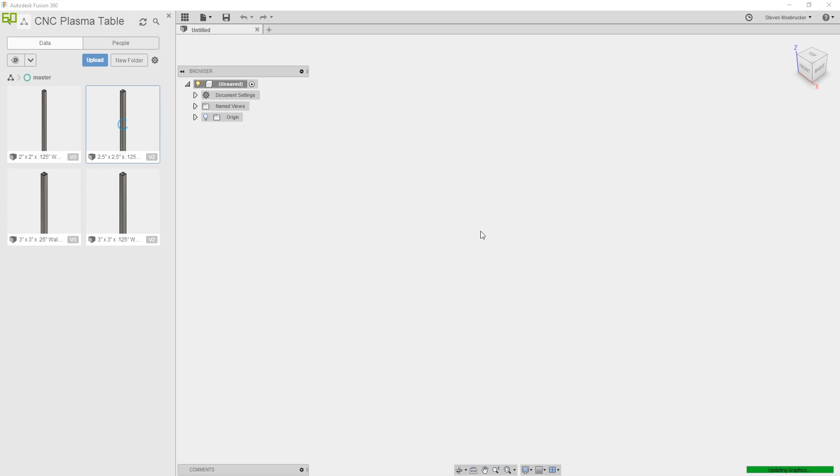So we are back working on the CNC plasma table. This is video number 3. Last video we decided on the 2.5 by 2.5 size beam for the arms and legs, about 2.5 by 2.5 by 1/8 inch wall.

Unfortunately, I forgot to call Sims earlier to ask if they had that. They closed at 12 and now it's 12:13, so no longer open. So I'm thinking somewhere around 2.5 by 2.5 for a decent size plate.

Why is it doing this? Oops.

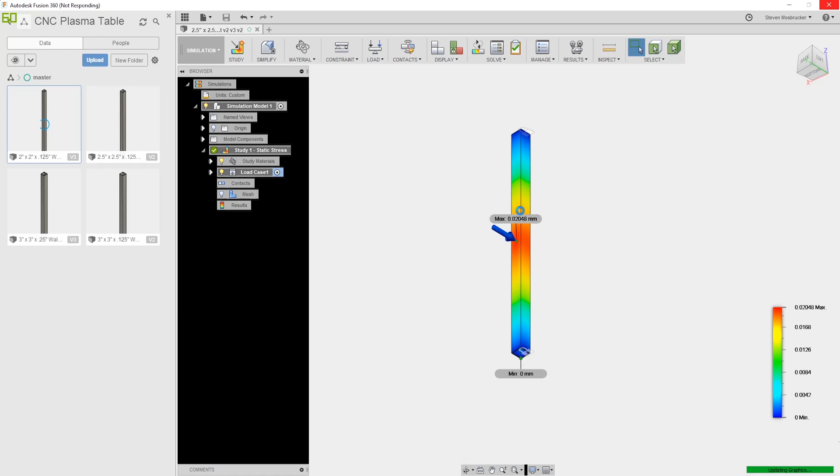Easier to install. So maybe 2 inches. 2 inches is pretty small, about like this. Apparently it says that it's okay.

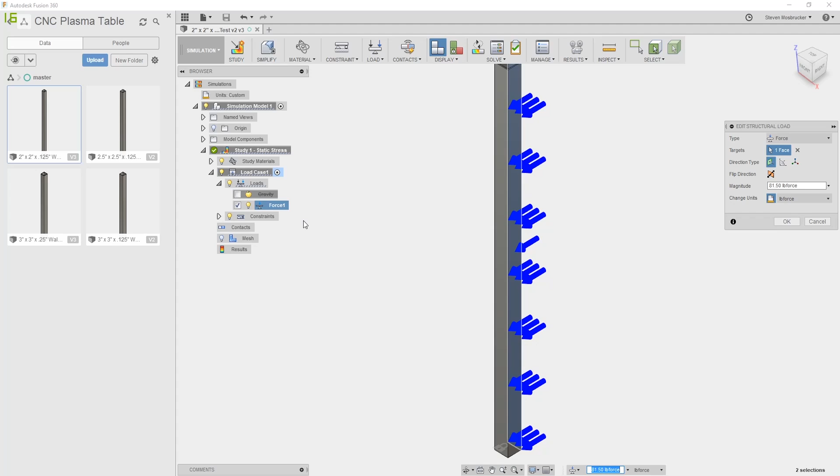Let's try this again, I wonder if it doesn't like me recording it. Yeah, this is 1.5 thou. I think this will be okay. For how much load is this? This is 81 pounds, so this is a normal load, I believe.

This is a 1/4 inch for this section, and obviously half here, half over there. I think probably split the difference at 2.5.

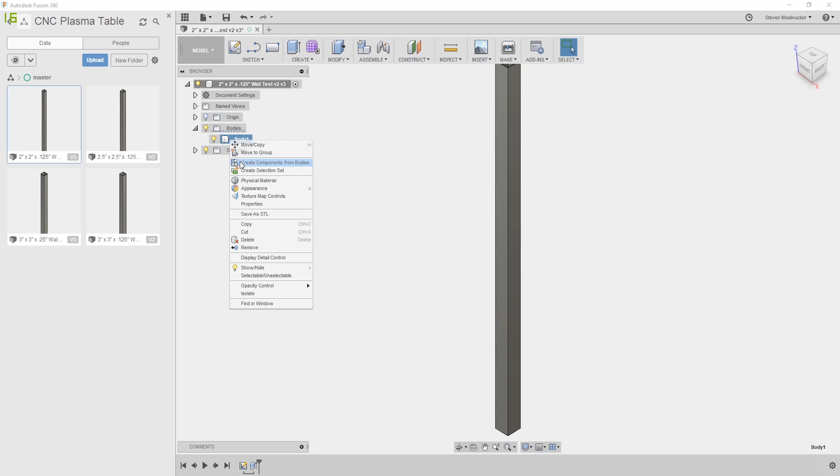Because this is 12-pound mass. Do not close, do not close. Okay.

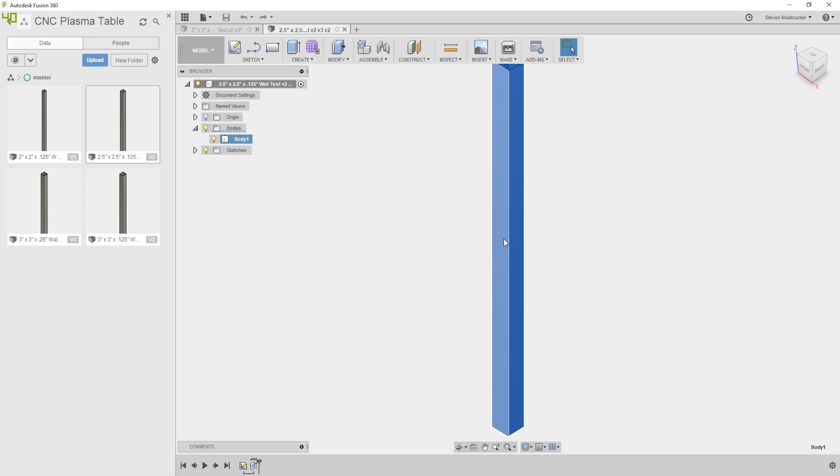And then this is 16-pound mass, so it's 15. The other one is 120 pounds, this is about 200 pounds. I think 2.5 should be okay.

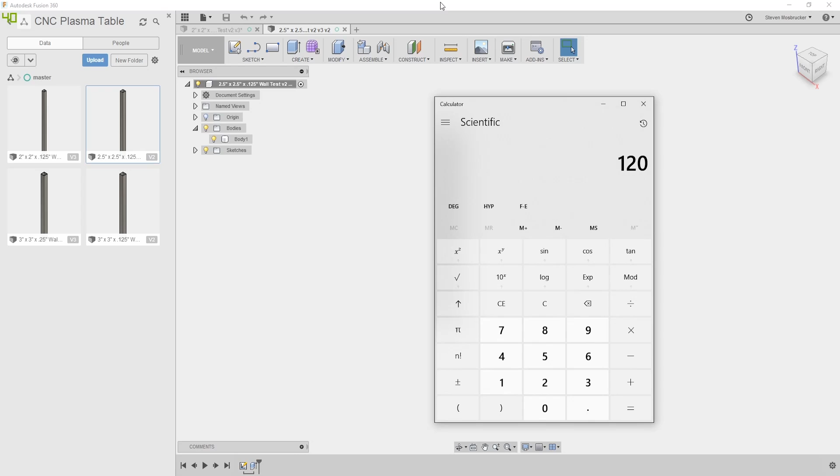So we'll run with 2.5 right now, and if not, we might change to 2 inches. But for 2 inches, it's 12 pounds - 1, 2, 3, 4, 5, 6, 7, 8, 9, 10 - it's about 120 pounds, the other one's about 200 pounds. So yeah, let's go with 2.5 right now.

Also, the 2.5 is going to be more expensive to run than the 2 inches, by how much is probably by pound. Maybe with the deal I get, it might be $100 for this one, maybe $80 for this one total, to build all the steel of the frame at least. I don't know about the slats, that's a different deal.

Okay, let's go ahead and start setting up the file structure here. So we have a layout, and then we'll have all our parts in here as normal. Layout, and what are some of the other ones we could have? Assemblies - I'll call these sub-assemblies, new folder sub-assemblies.

That's where we're going to have smaller layouts. For example, the gantry itself, have that laid out so that when we bring it into the main layout, we could have it update from the sub-assembly.

Let's do 2.5 for right now. Okay, so let's create a new design. This one is going to be called main, this is going to be a main assembly. Should probably also call this assembly, so I just generally call them layouts.

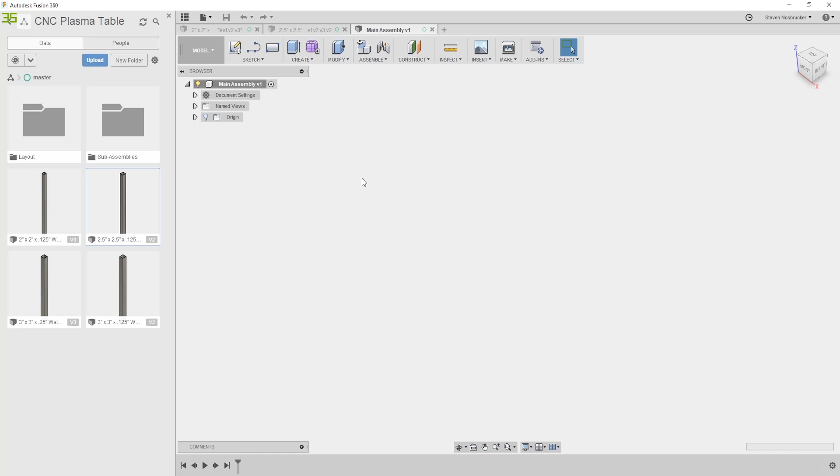Okay, let's go ahead and drag this in. So another question we have is whether this is going to be a continuous piece, 8 feet long, or a smaller piece, 4 feet long. I'm thinking more of the 8 feet long. The main problem is whether these will be bent or not. I know that Sims for sure sells at 8 feet long, so maybe we'll create an 8 foot long.

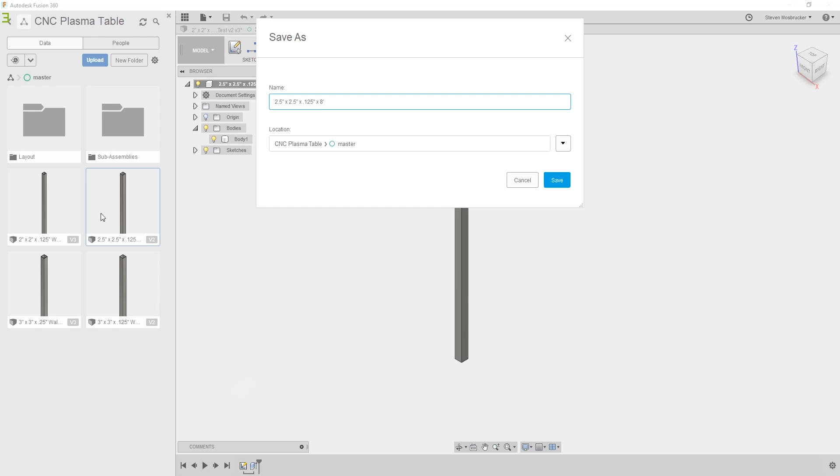It says file save as, 2.5 by 2.5 by 8 feet. Okay, and this one's going to be the 4 foot. So we are going to use this one, we're going to use 2 of these. Also, we need to edit this so it's 8 feet long, and these 4 feet. So let's go ahead and save this.

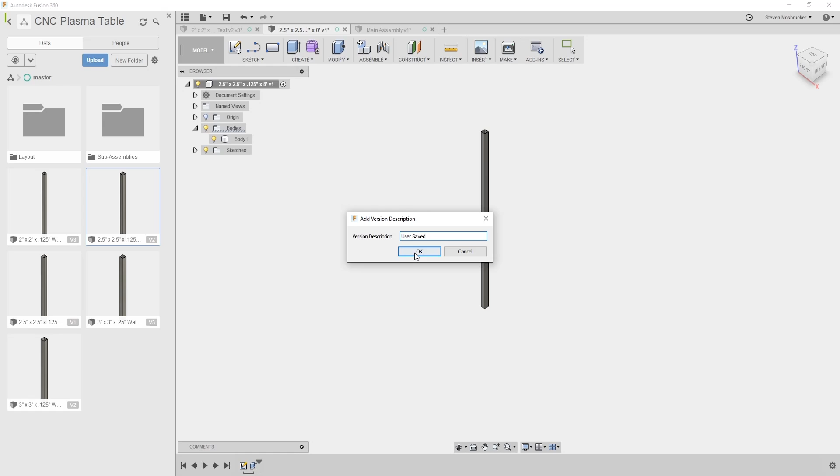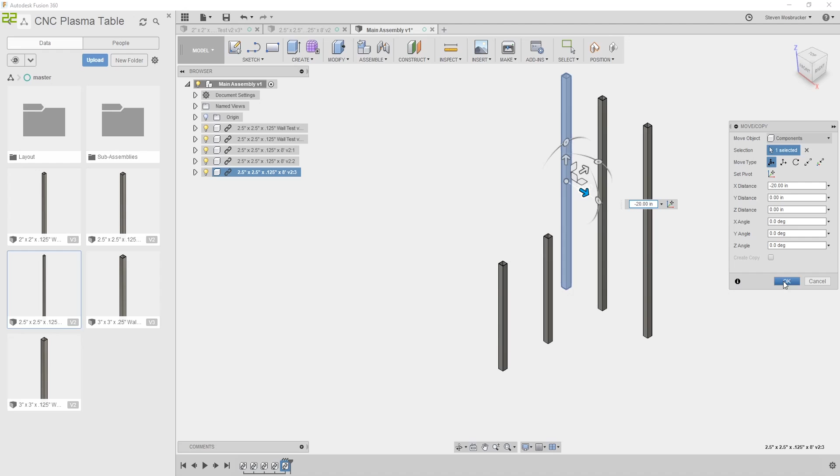Oops, go back to the main assembly. Copy, paste, move it over. Copy, paste. Oops, say OK. Copy, paste, move it over. Sorry, I only need 2 of these, 2 of these. Okay, so.

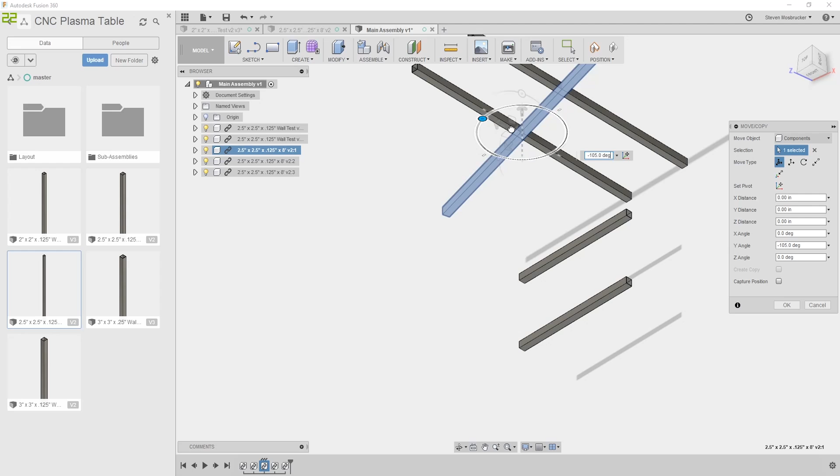Now what we're going to do is go to the top and rotate these so that they're flat, so we're looking at the right views. So let's go ahead and rotate these. Rotate. Looks like we have one extra still in there. This one, move.

Rotate. Okay. Also, another thing is that these are probably going to have to actually be longer depending on how we have these lapped. If we have these lapped how I think we're going to have them lapped, we need at least 2.5 inches on each side.

So what I'm going to suggest is go to this one. No, this is no longer the one that we have. We're going to do 2.5 by 2.5 by this one. Bring that one up, go into model, and then we need to have these.

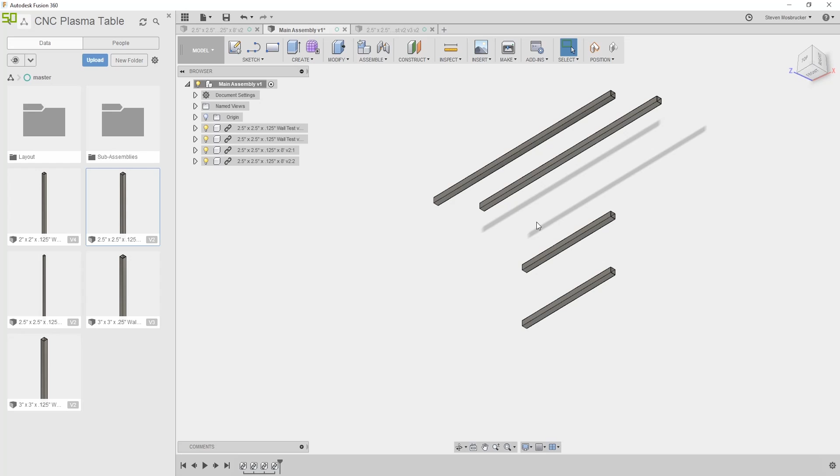I'll show you guys what I'm talking about here in a second. Because we could just worry about that. That's why we assemble things digitally first, which I'll show you guys how I expect to lap them. Capture position. So here on one, and then here on the other one, which is going to be here on this bottom corner.

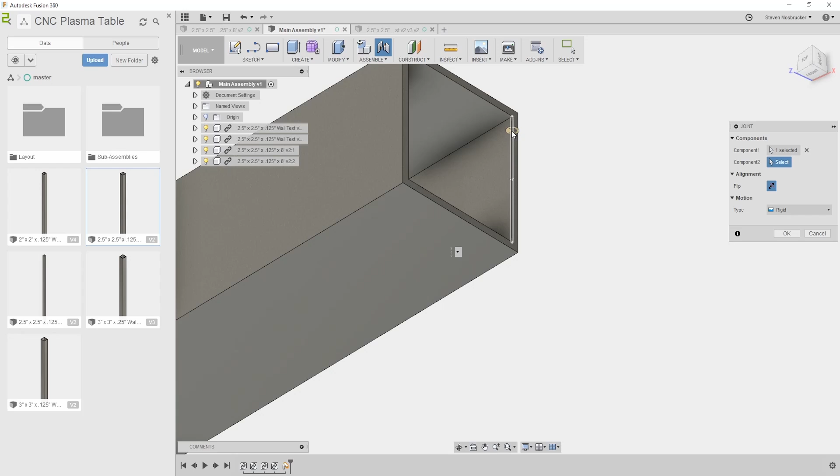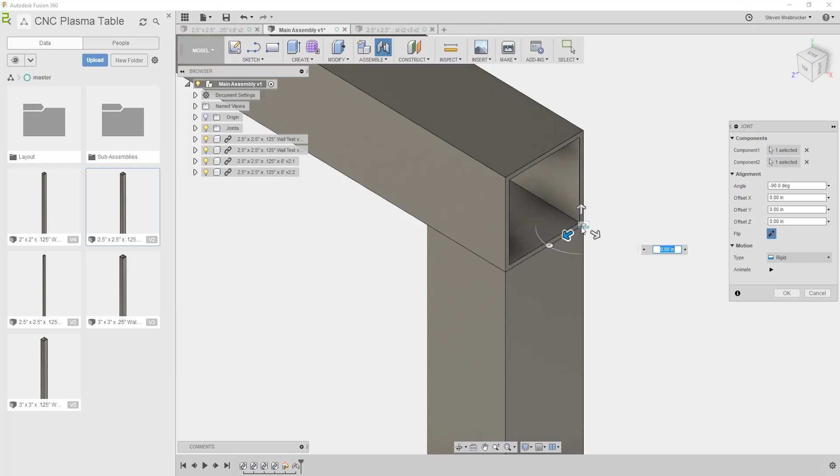Okay, alright, you want to go that way? That's fine. Okay, so then here on this inside corner, then here on this inside corner. There you go. So there's half the frame, and then from here, this inside corner. This inside corner.

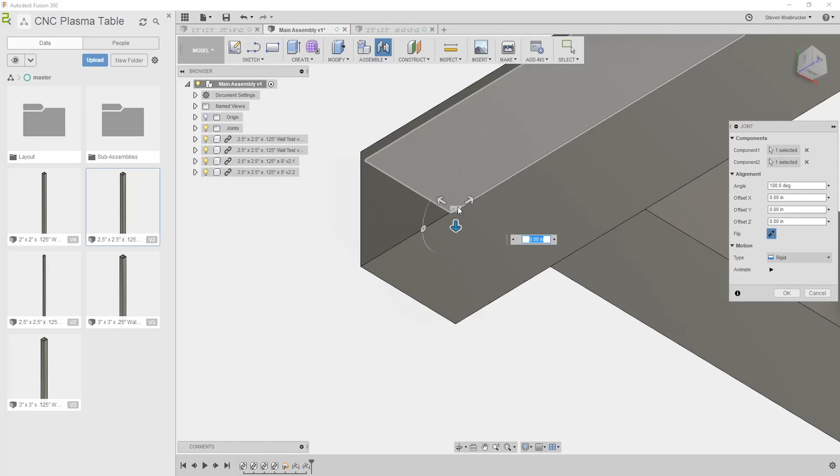Rotated 90 degrees to 180 degrees. There you go. Uh-oh. What? Oh.

Yeah, see, I did it slightly differently. This is supposed to be, I guess I could do that, technically. But then that would mean that this other one needs to be longer, instead of these ones being longer. So how do I want to do that?

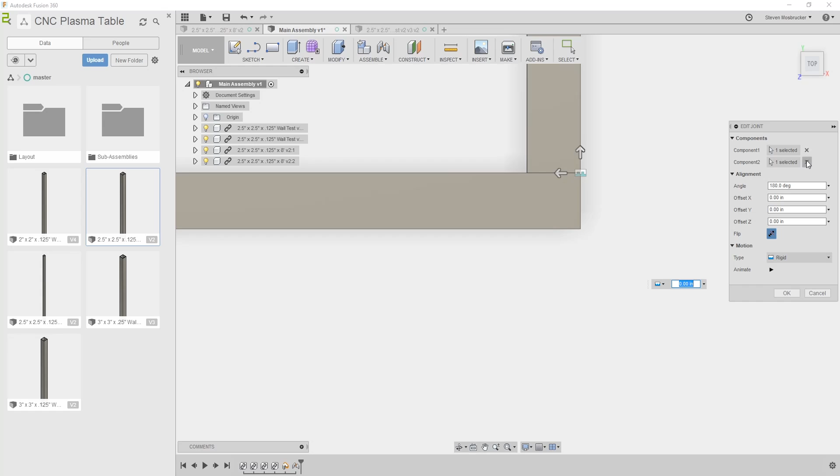So yeah, let's modify this. Let's go ahead and delete this joint. This joint, let's edit. Okay, so this one is going to have something. So what I wanted it to do is that these are outside, like this bottom corner, and somewhere over here like that. And that's not quite right.

Minus 2.5 inches. Nice, there you go, like that. And probably what I'll also do is I'll probably also put a scab across there so it grabs on all sides instead of just on the skin of that thing. Put a scab there.

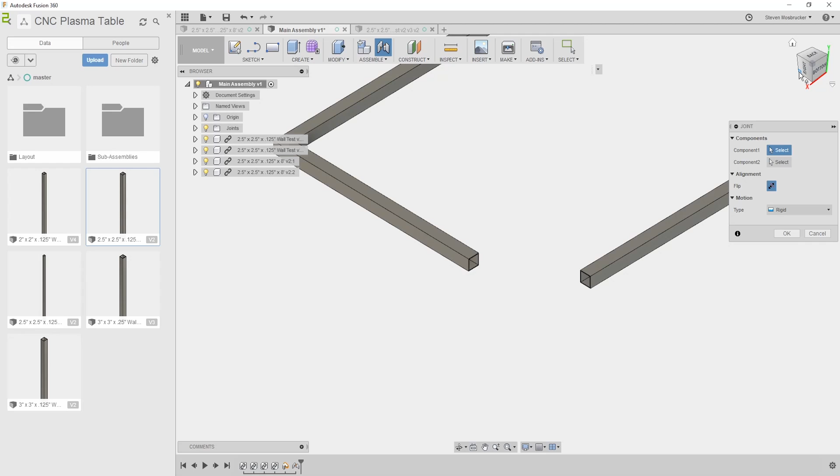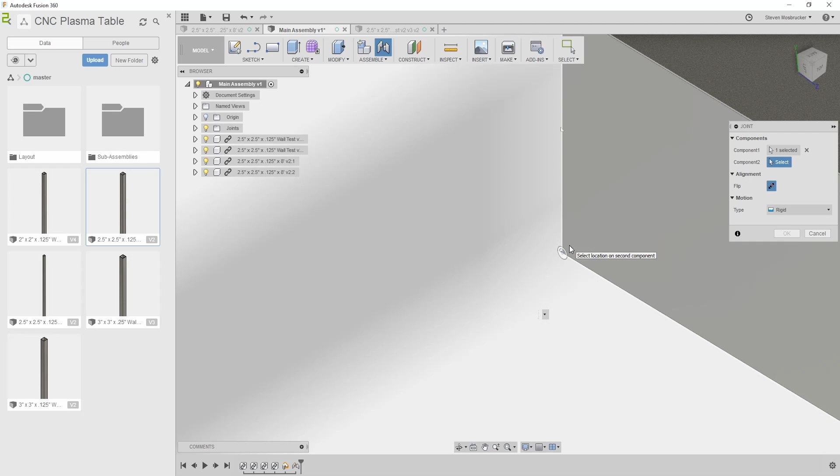And then here, because also I have an 8-foot bed in my truck, so I don't want it to be longer. And also I won't have to haul as long of a piece because these are definitely going to be shorter. So I'll show you guys what I'm talking about here in a second, why one of these has to be longer. Okay, oh, that's a short piece. The long piece.

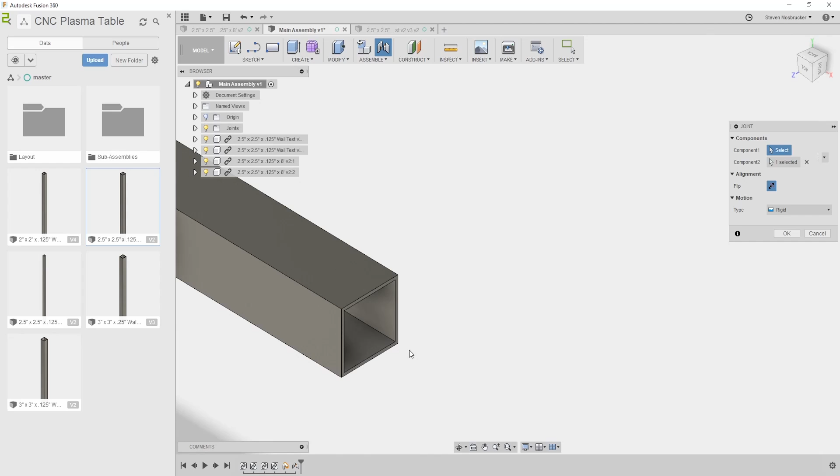There we go. Yeah, it matters whether that thing turns white or not. So, last joint, that side here.

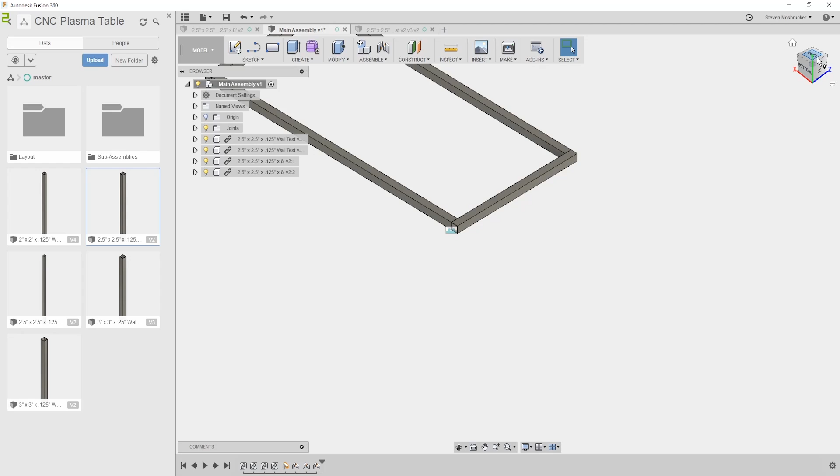Okay, so now there's the start of our frame. So now when I measure it from here to here, distance of 43 inches, which is 4 feet is 48 inches. So it's minus 2.5 here and 2.5 here.

That being said, we need to go back here, and these, in order to be long enough, have to be, which I'm going to have at least half an inch on each side, because mainly the problem with the travel. So this guy is definitely going to have to be, I'm going to say maybe 10 feet, let's say 9 feet. Let's try 9 feet.

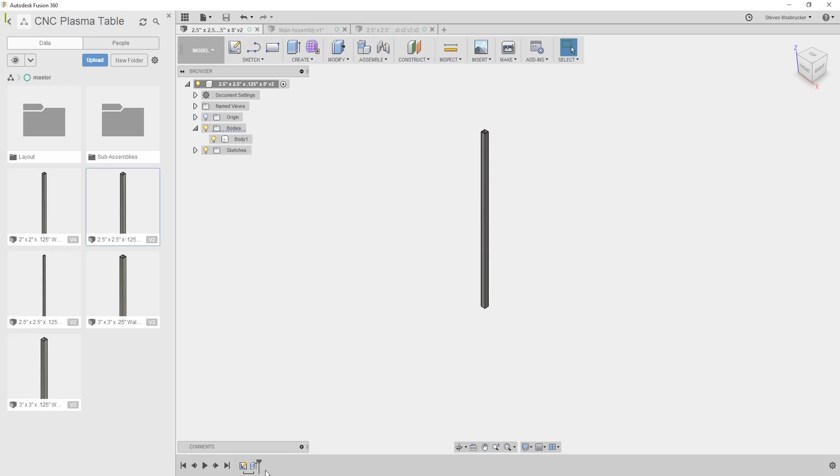So let's edit this to 9 feet. 9 feet, 9 feet. Save it. Go back to main assembly. Update. There you go, 9 feet.

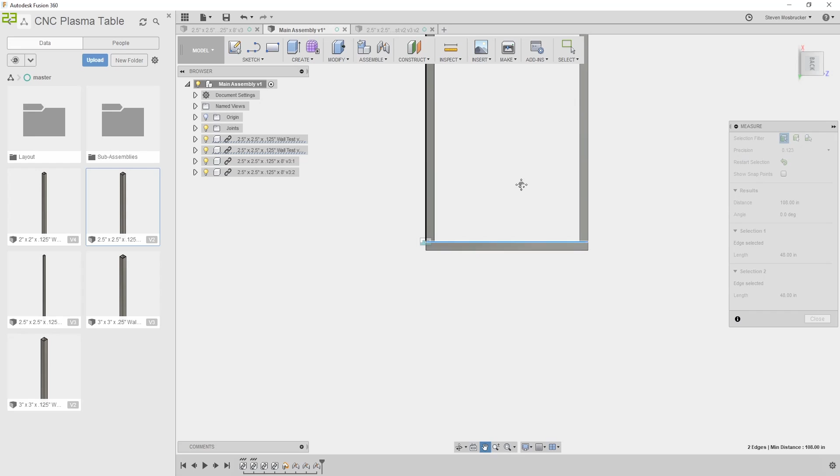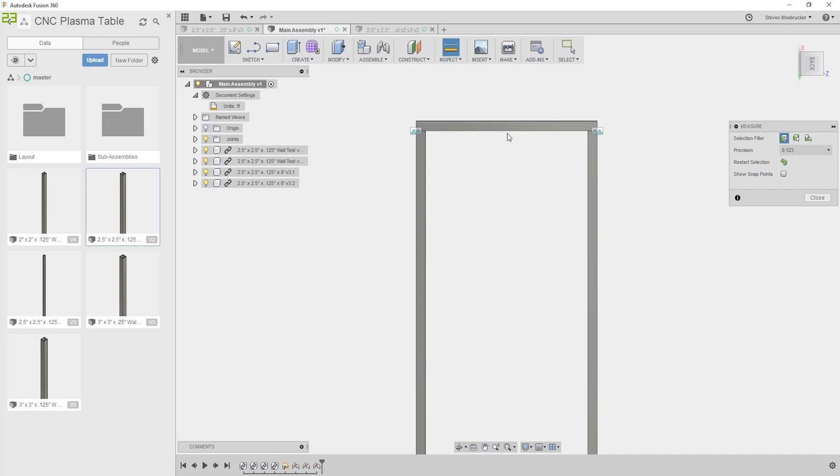So now what's the distance from here to here? This length is 48 inches. Wait, what? Oh, 108, which is 108 inches. Let's turn this into feet. Document settings, inches, feet, foot. So it's a little bit easier to see these distances.

This is 9 feet, so that's an extra foot. Well, there to there should be perfectly 9 feet. So here, maybe have half a foot, 6 inch extra that I could go back and forth, so 3 inches. So let's turn this one into 8.5 feet.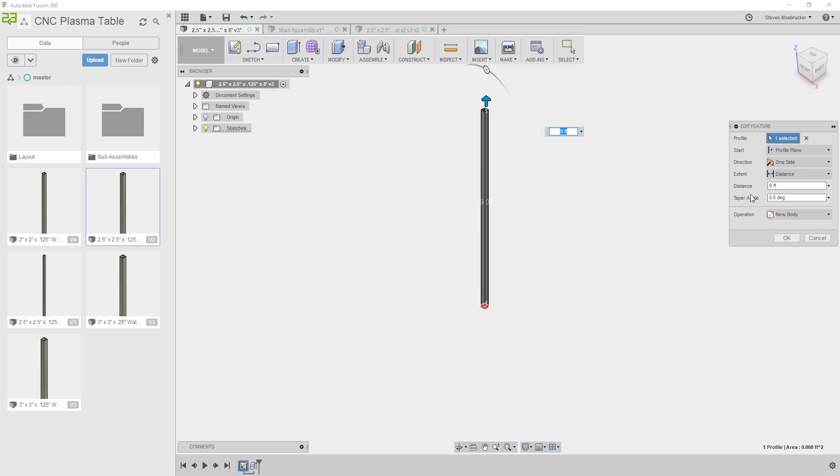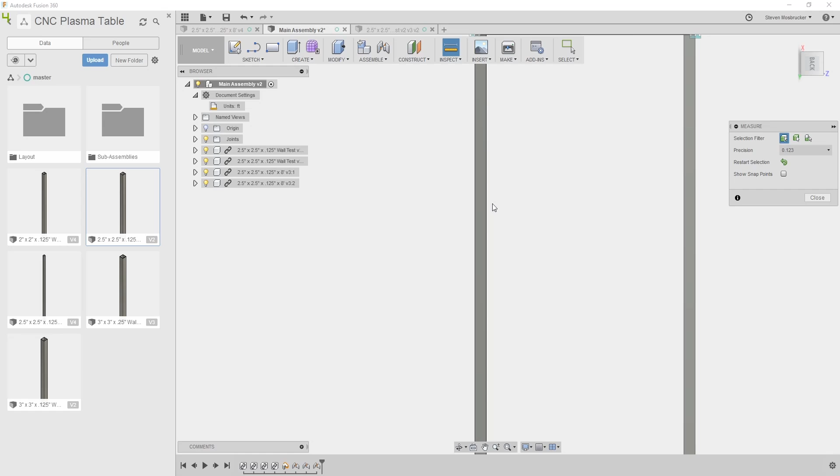Oops. Whoops. Let's save this one. Update this. So now, with this way, so these ways are obviously 8.5 feet. Oops. 8.5.

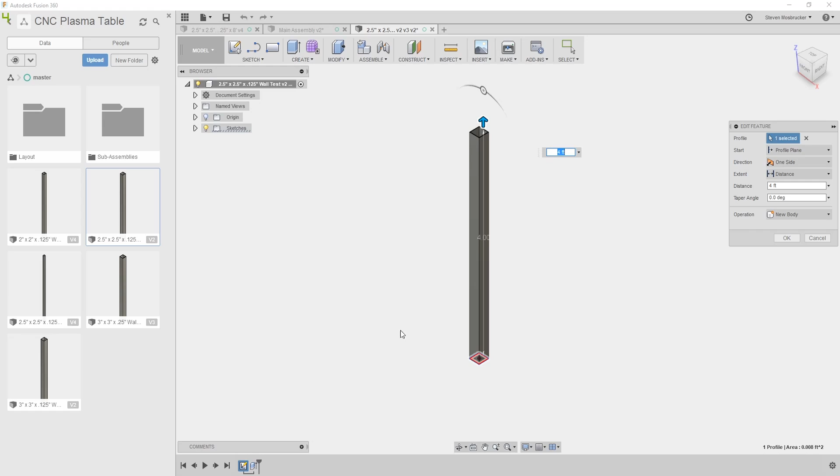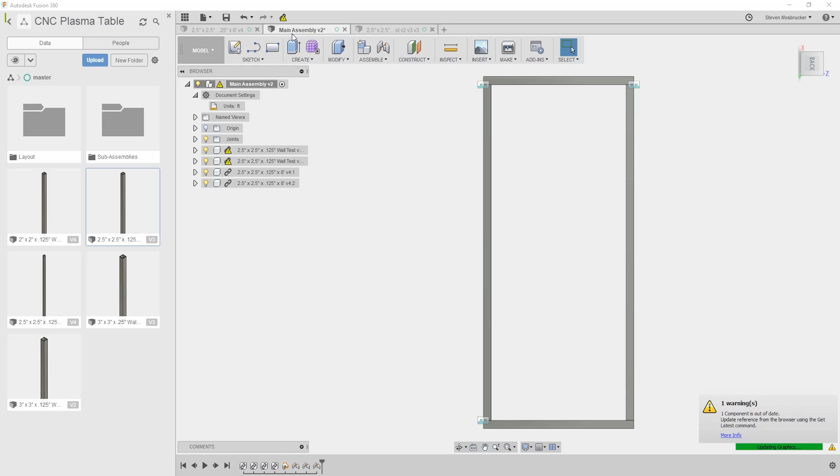So now what about from here to here? See, this is 3.5 feet. So let's add another foot to that. So let's go here, edit the top here. So now this is 4 feet. There you go. 4.5 and plus a little bit feet.

Alright, so there's our table. Total weight is, properties, total weight is 109 pounds. Just those pieces.

Alright then, how tall do I want? I'm about 6 feet tall. I'm cool if it's maybe up to about midsection level, so maybe half my height. So let's say maybe 3 feet off the ground or so.

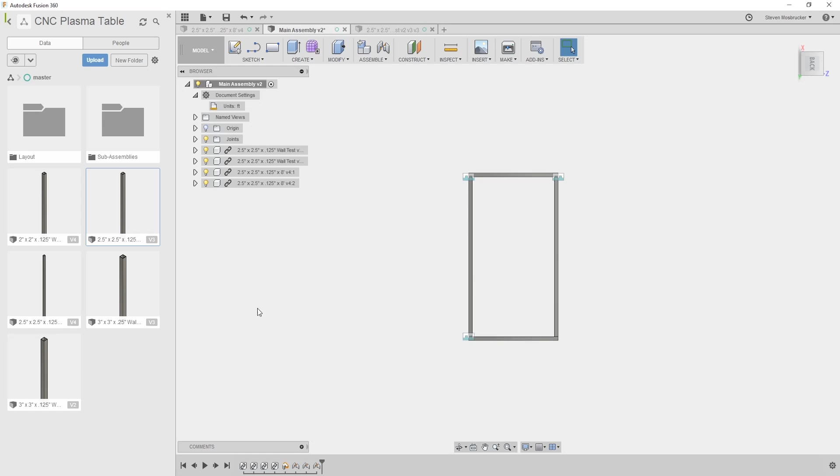So let's have this one, this file save as, let's say this is a leg. Let's say this is 3 feet.

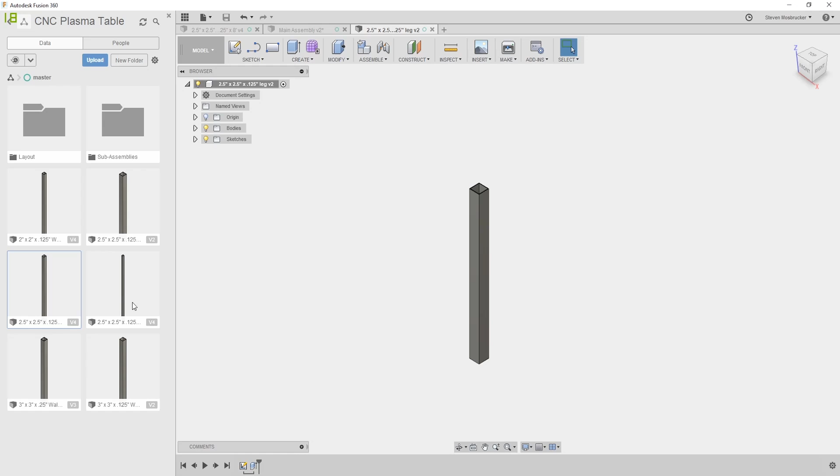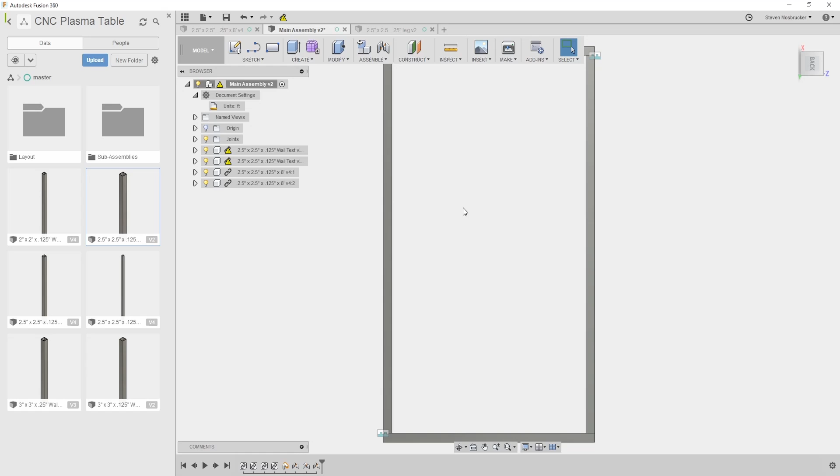I don't know which one this is. Which one of these? I think it's this one. No. No, it's gotta be this one. Yeah.

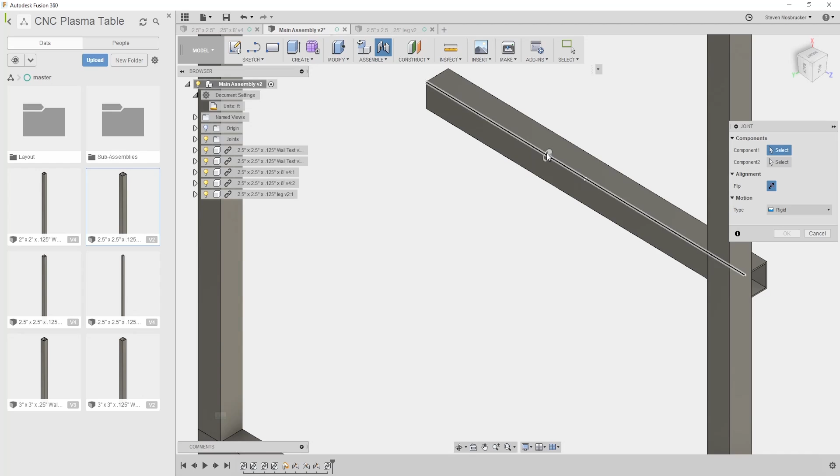So there's a leg. What the hell? Oh, it's the other way, okay. Back left corner. Or back right corner, or whatever.

Also put a scab across there. Then this is basically going to weld onto the scab. So there's going to be a scab plate down there. That's going to weld onto the scab.

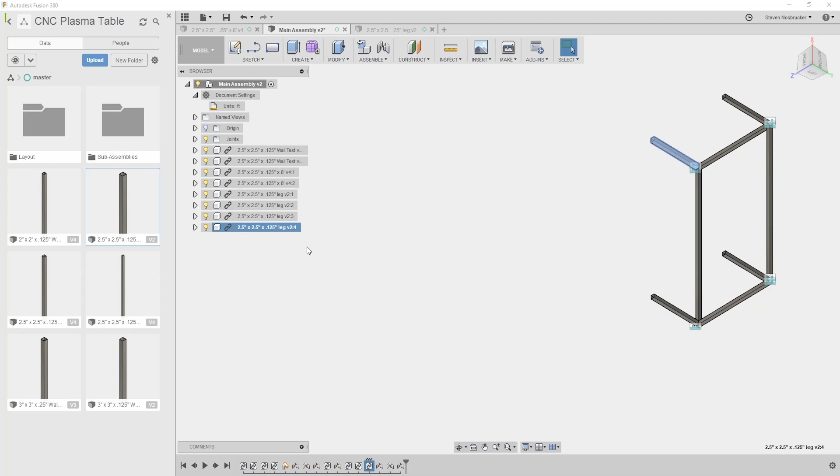Now we need some in the middle. So what I'm going to do here, it should give me a middle section actually, now that I think about it. So I should be able to just do joint, hover somewhere.

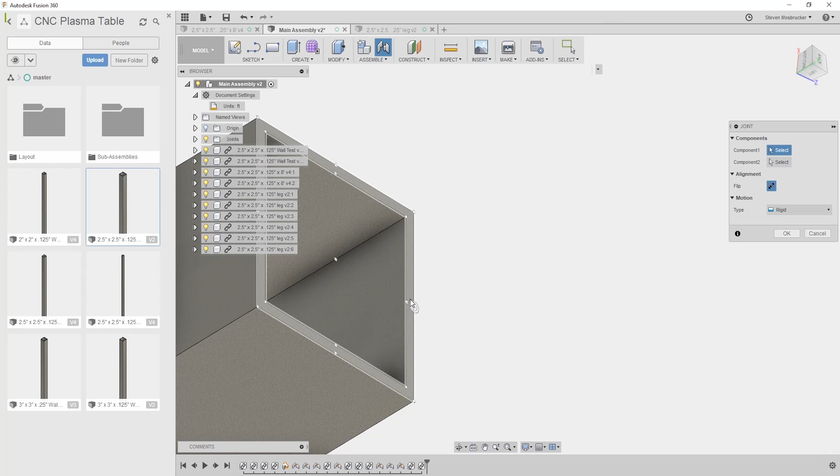Oh, I can't hover in the middle. Oh, but I can hover on the outside corner. Okay, so it should give me the outside corner.

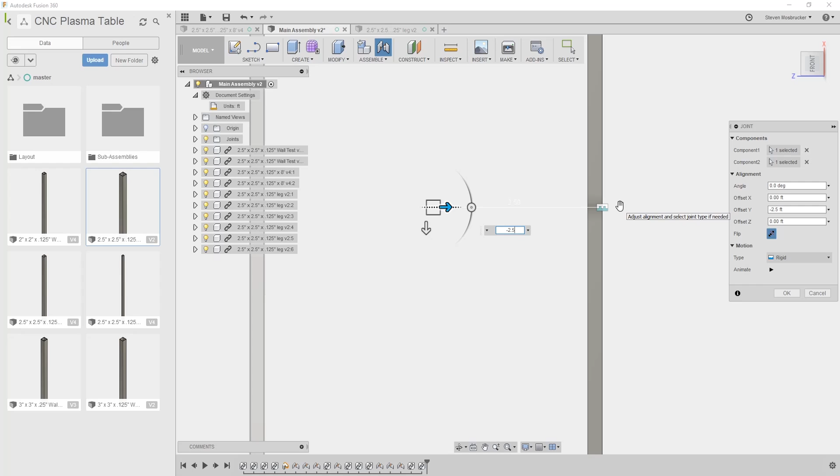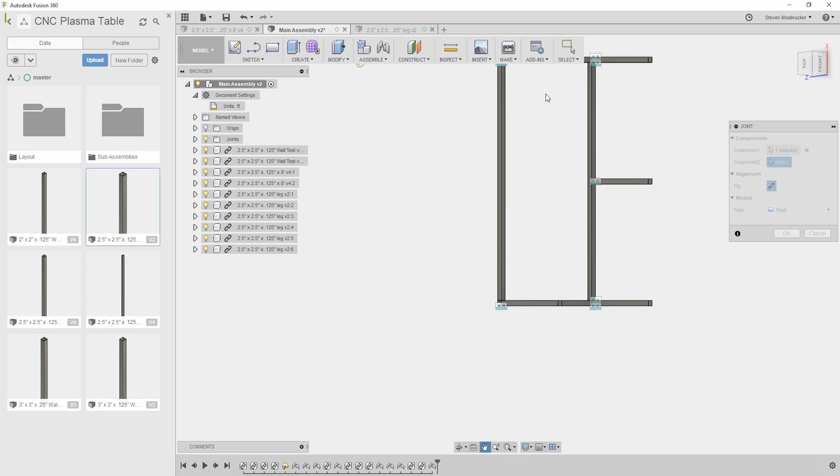Like so, I think I picked the wrong side, whatever. This is minus 2.5 feet. This one, same thing, now pick the right side. And there we go.

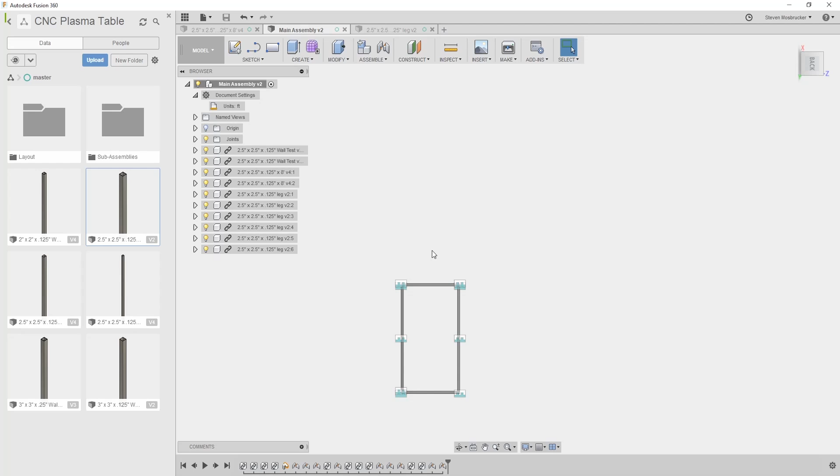Okay, now let's don't show the joints, save the assembly, let's go into simulation, use static stress, and let's go ahead and run some constraints. Actually, first thing we're going to do is run some automatic contacts.

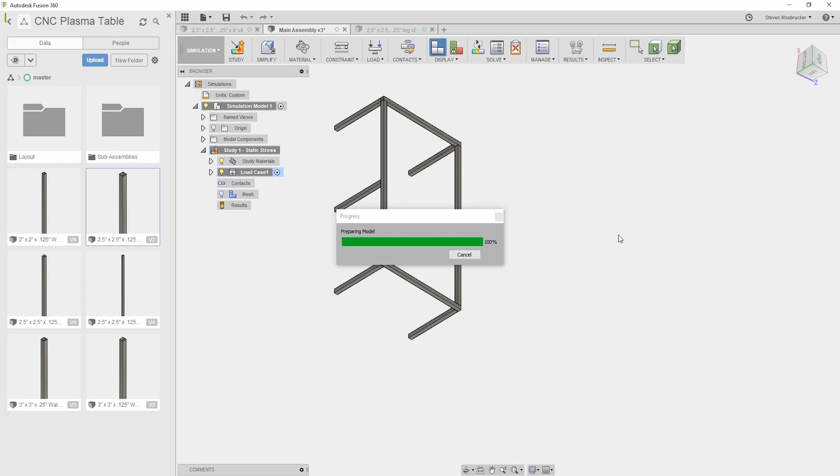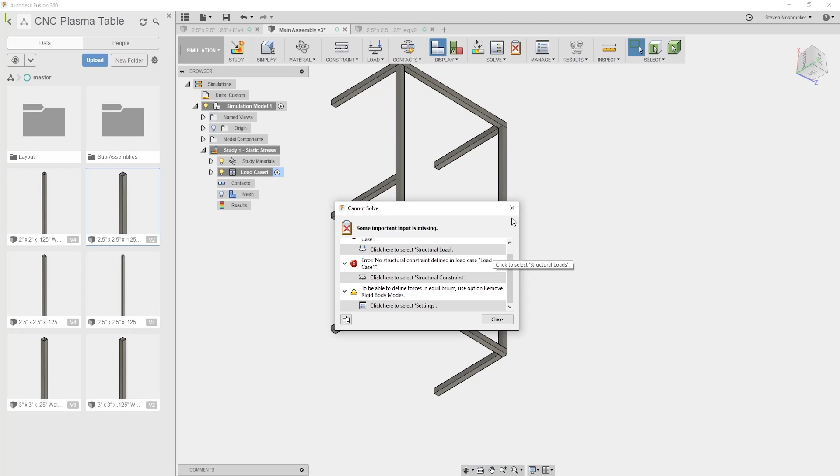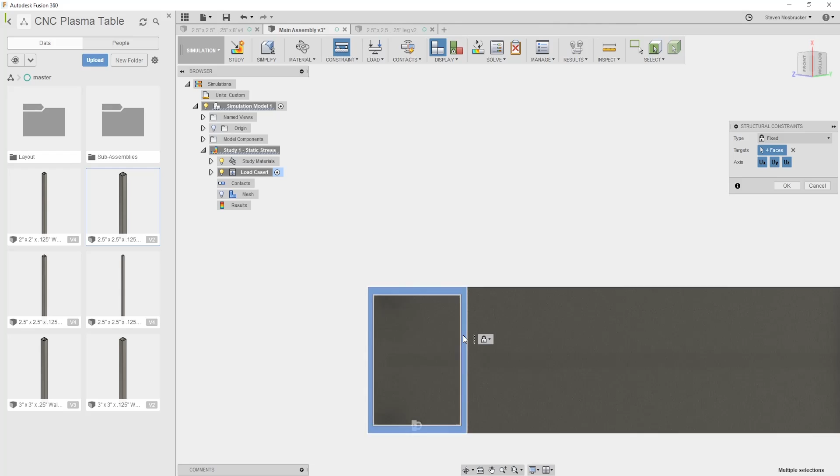Also now we should be able to do weights or whatever, but then also another thing we're going to have is these in buckling. I think these will be okay in buckling. Buckling generally fails stuff pretty easily, buckling and torsion way more than bending. Regular bending in the middle. Let's go ahead and do that.

And then let's do a weight calculator. Steel A36, flat plate, number of pieces 1, gauge 0.5 inches or so, maximum width 48, length 9 times 12, that's 108. Calculate. 733 pounds.

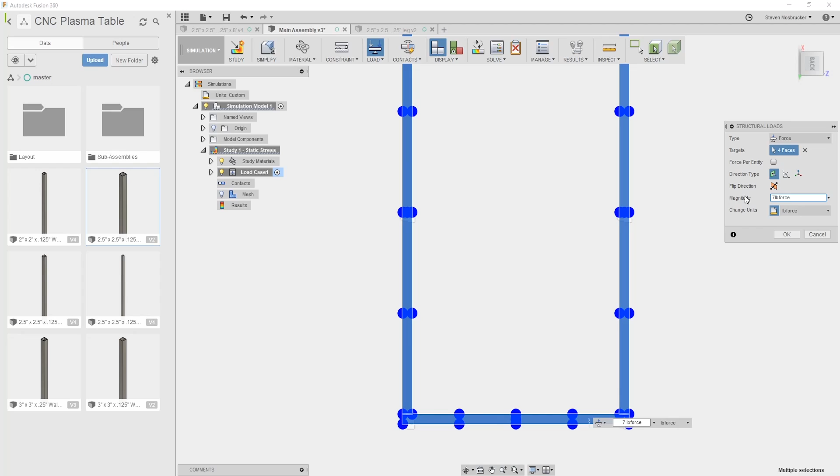Okay, everything's good, everything's green, ready to go. Solve locally. Solve.

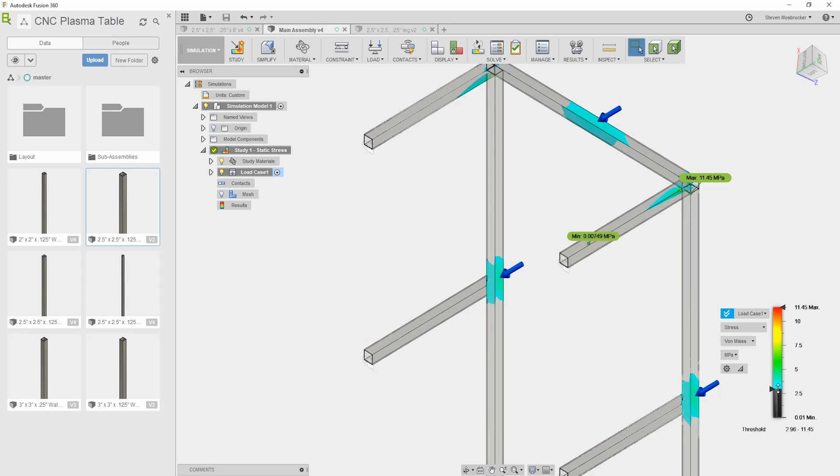Alright, actual deformation, safety factor 15, it's good. Result stress, stress is located in the joints. Yeah, right at the displacement. Ooh, that's high.

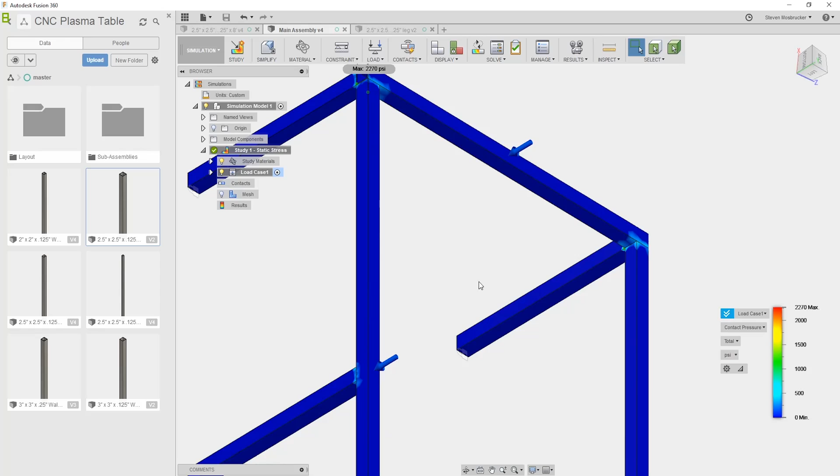It's 4/1000 of an inch right there. Base. Contact pressure in PSI. Set the junctions. Pound force, 19 pounds per leg.

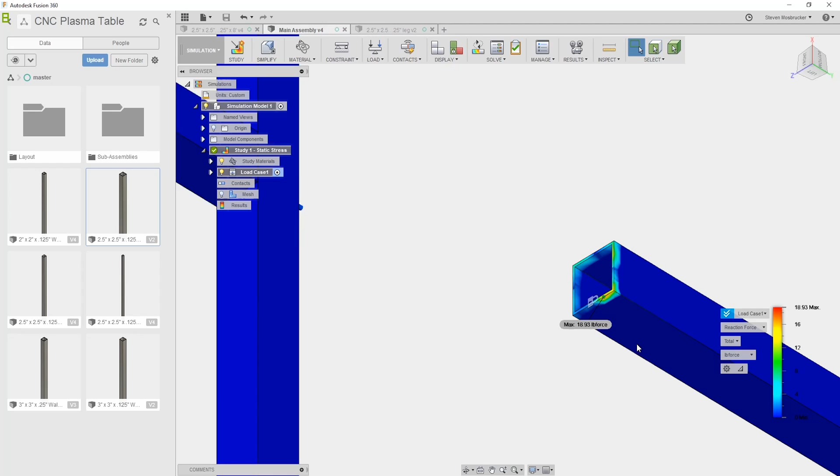That doesn't sound right. Nineteen times 6, it's not 700.

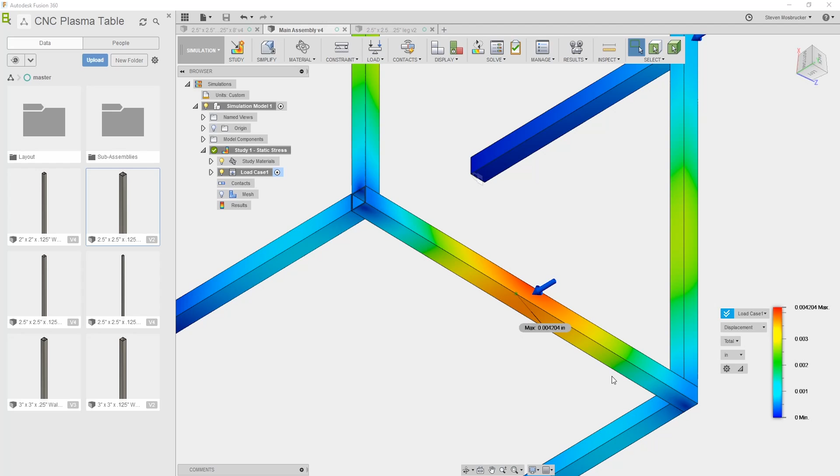But again, this is a worst case scenario for this small little piece here. Ooh, not micron, so it's 4/1000 of an inch. So see, most of the stress is in these two places. So again, if I wanted to ever add any more, I could have some tubes come up from here and go up and then down, and cut some miters in them, and have them go like that to miter and come up and help these a little bit.

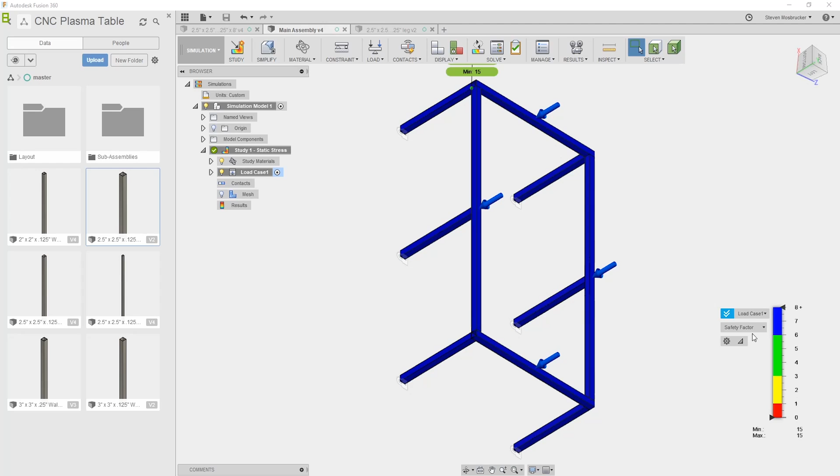Stress, 1600 psi, minimum 1 psi. So I think this will definitely take it.

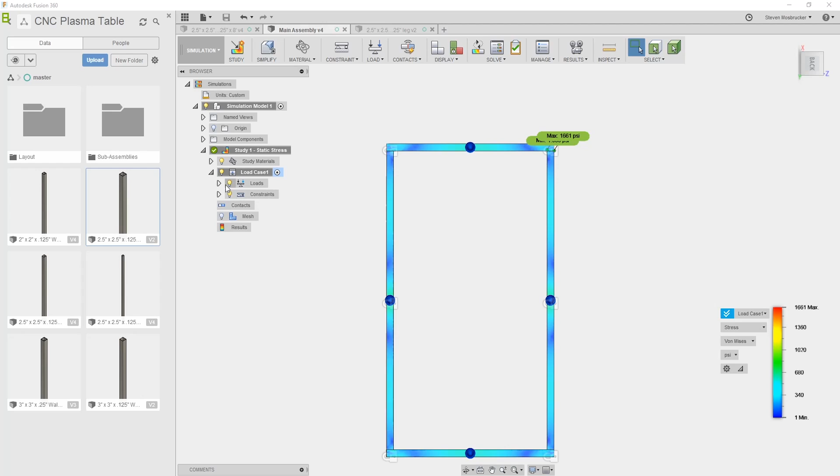So one last one before we go off. Let's try 1 inch thick plate steel A36, which is 1467072. Just go ahead and run this, and then we'll stop the video there. We should maybe see a safety factor of like 6 or so.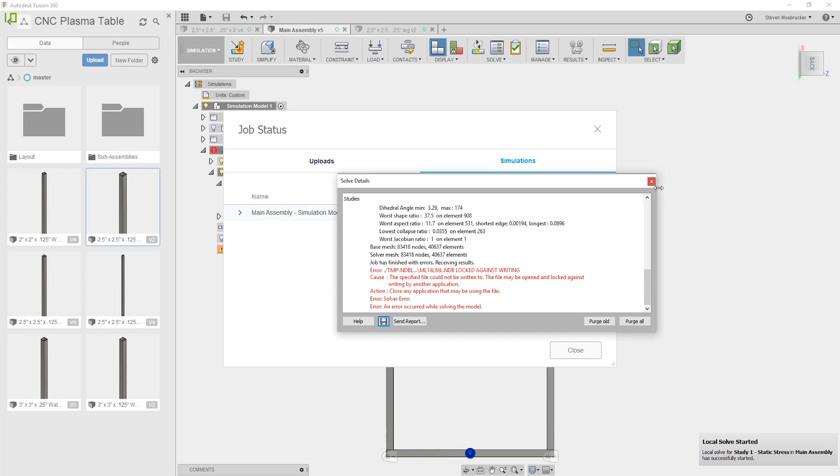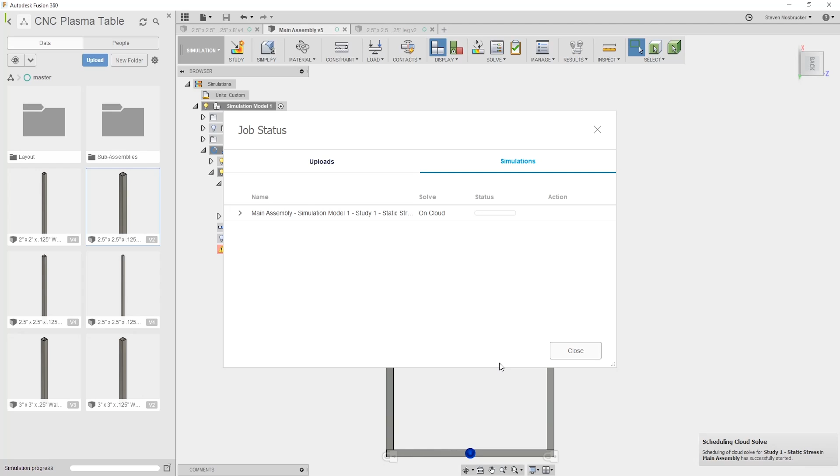Let's just change one of these to 0.1. Let's do on cloud. So now it's on cloud. We could even do some other stuff.

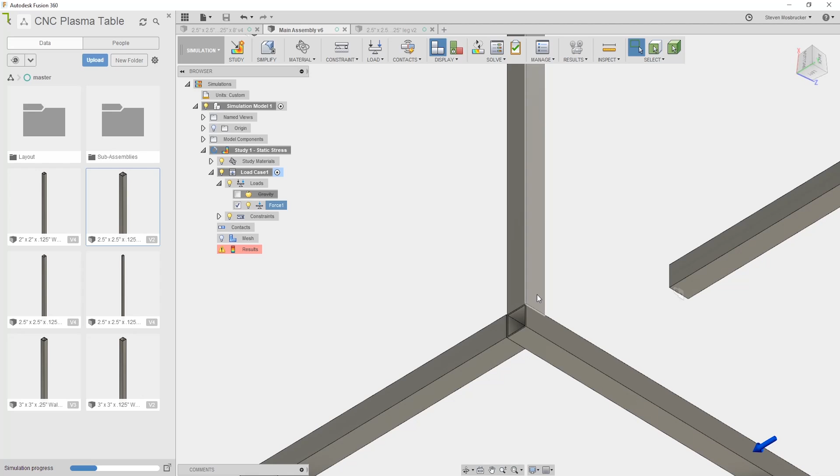So yeah, I think this frame is definitely good enough how I have it set up, just simple here. And then the rails are going to ride on top here. So we have like some tubular structure that would ride on top here, ride all the way up to this point. And then with the belts, we would have a belt attach point here where we just drill a hole and put the belt in there. And then here also drill belt. And so we have as small a length of belt as possible, which is 8 feet is the smallest we get.

Obviously it needs to be a little bit longer than that in order for it to go up and over the gantry to get on there. So we're probably going to use like the old school gantry style where it has the 2 belts, it has 2 pulleys, it goes up and over the belt.

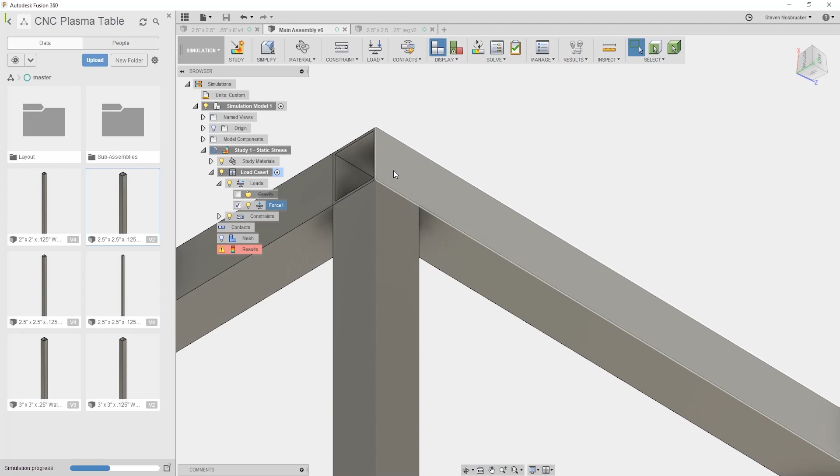It has 2 bearings. It goes under the bearing, up, over the pulley, down, and back under the bearing, and then it is tightened down to these pieces here to keep it from slipping. It's fastened to the edges here. So 1, 2, 3, 4 positions. Goes up and over the belt, and then we have another one that goes across, and that sits on top of that gantry. And this way we have very little weight still.

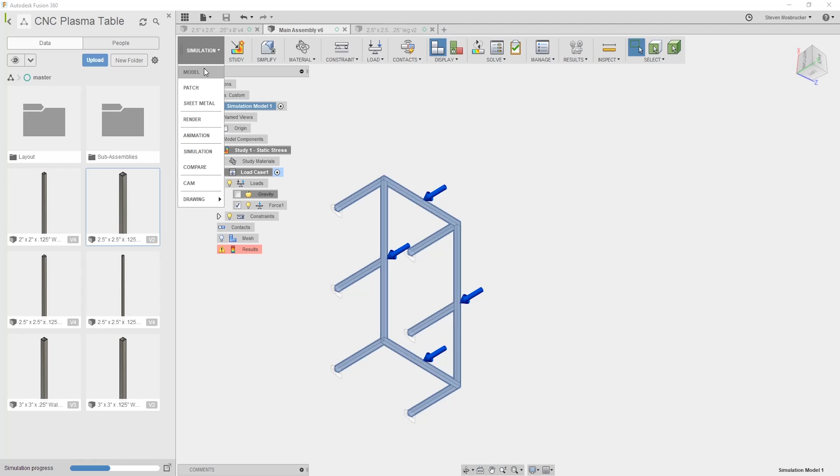Let's see what our actual weight is here. It's in kilograms. 181 pounds. So with that last piece, we're probably looking at, we got 200 pounds. Should be easy for 2 people to lift this up and bring it inside, be able to haul it around.

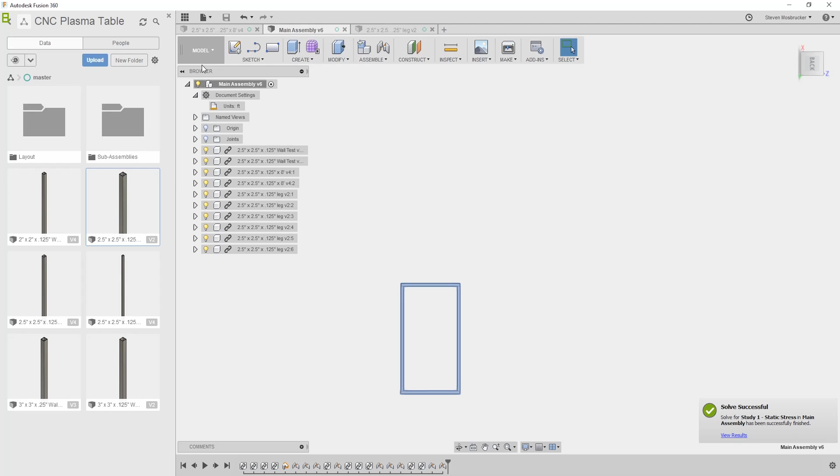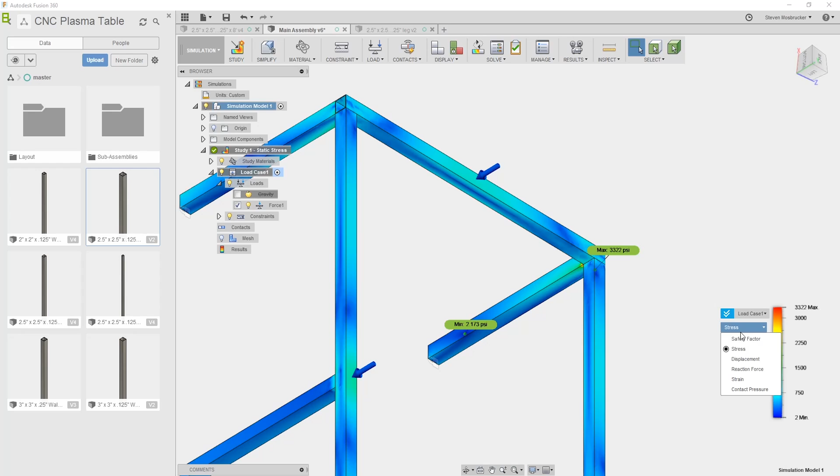Okay, so we have an actual minimum safety factor of 10 now. So let's see where the safety factor is there. Stress, okay, we're definitely getting up in the PSI, 3.3 thousand PSI. And what are we getting for displacement? Displacement maximum, in inches, is 8 thou. I'm fine with that for a maximum of a 1 inch plate.

Alright, so I'm happy with this. Maybe we could even drop it down to a 2 inch tube, but we'll run 2.5 for right now, just just to be safe.